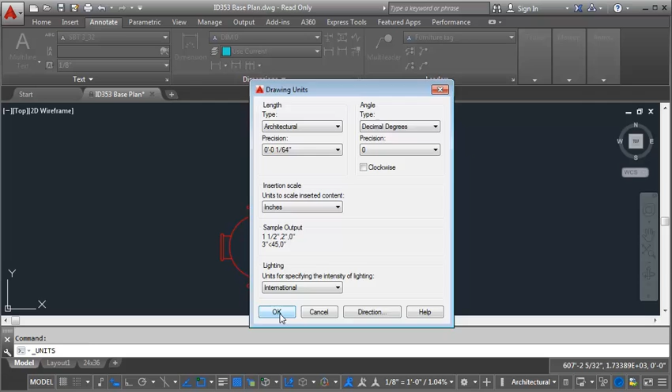Now what I want to do is go into the Insert tab and go to Block Editor. The block that we use for the tag is this tag circle, so I'm going to select that. Then I'm going to select the circle, which is this part of the block, and let me close this over here. I'm going to open up properties and see what size the circle is. Right now the diameter is 1/4 of an inch.

What I want to do is make it just slightly bigger, so I'm going to go up to 9/32. You can see it just jumped up a little bit in size. Now I'm going to go in and say Save Block, and close my block editor.

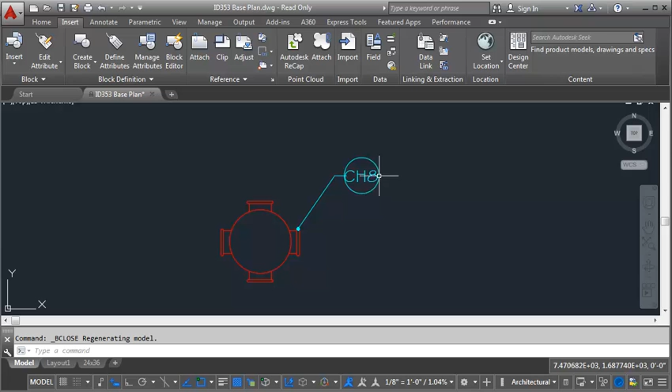Now you can see that my circle is big enough now to contain that CH8. The downside with doing this method, you can see that the tag I've already put in, there's this little extra piece that you then have to kind of deal with.

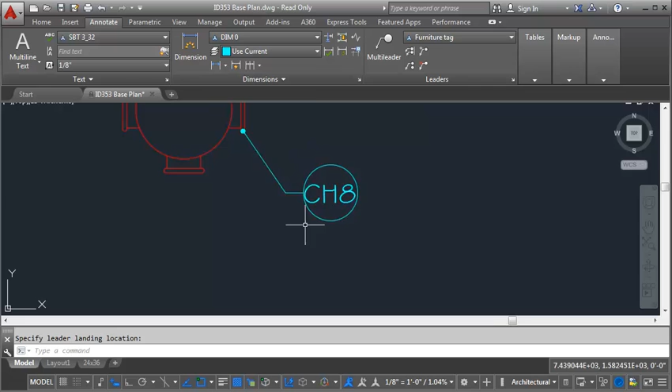But if I then put in a new tag, and then I put in my CH8, then you can see it deals with that insertion point there. So if you make the change before you start tagging, or you've only got a few tags and don't mind redoing a few, then this method works just fine.

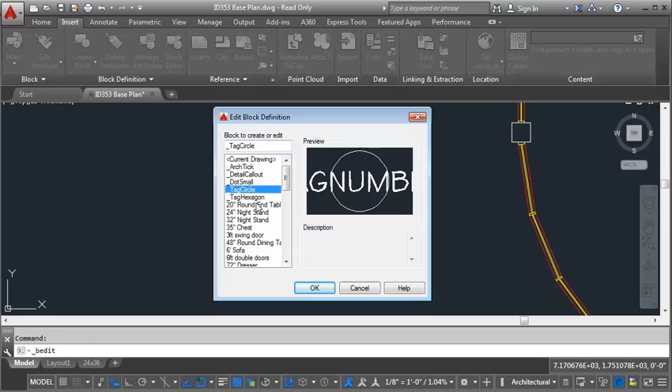So now what I want to do is go back in and undo that change, so that I can then show you the other method. Let me select my circle again, go back into properties, and set it back to 1/4 of an inch. And I'm going to hit save and close.

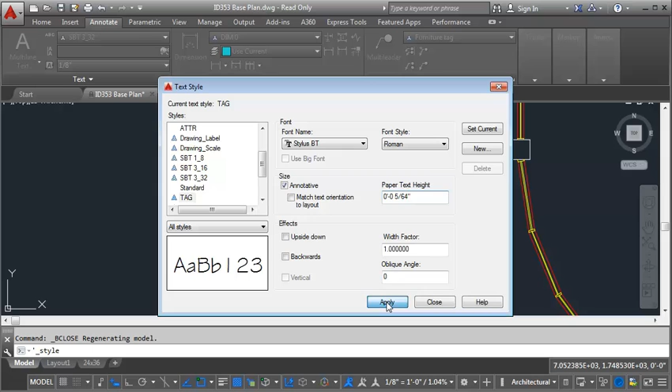It's a little bit of trial and error with this, but we can see how that will work. So now we're going to go back into our block editor, and this time I'm still going to go into tag circle, but this time I'm going to select the text and go into properties, and set the style to tag, and you can see it drop the size a little bit.

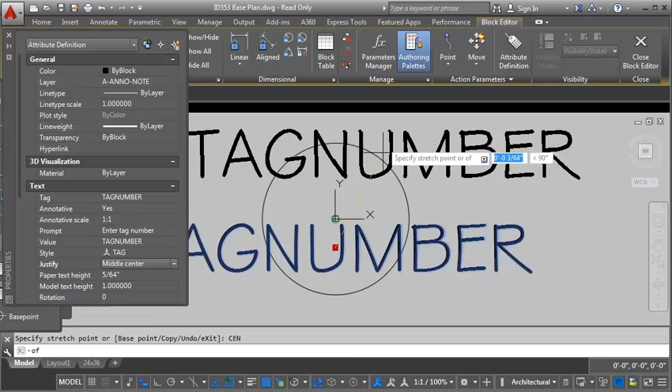Now the other thing I want to do, when I'm changing the size, it might adjust the justification. So I want to make sure that my justification is set to middle center, and that the insertion point, which is this grip here, is the center of my circle. I just want to make sure that doesn't adjust the justification. So now I'm going to save my block and close my block editor. And you can see that, again, it's now fitting nicely within the circle.

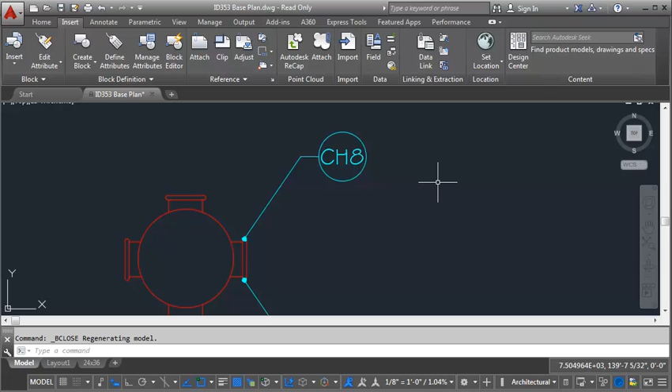So either method works, it just kind of depends on how many tags you've got in place already. If you've already got a bunch of tags, I'd probably go with the text method, because the difference between the text size and the 3/32 inch we typically use for notes is going to be very, very negligible and really not that apparent visually. So like I said, there's always more than one way to do this, and it's good to know a couple of different options.